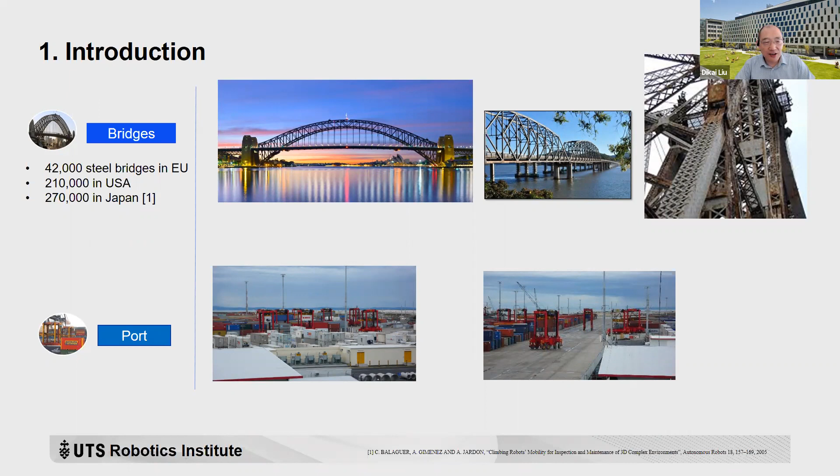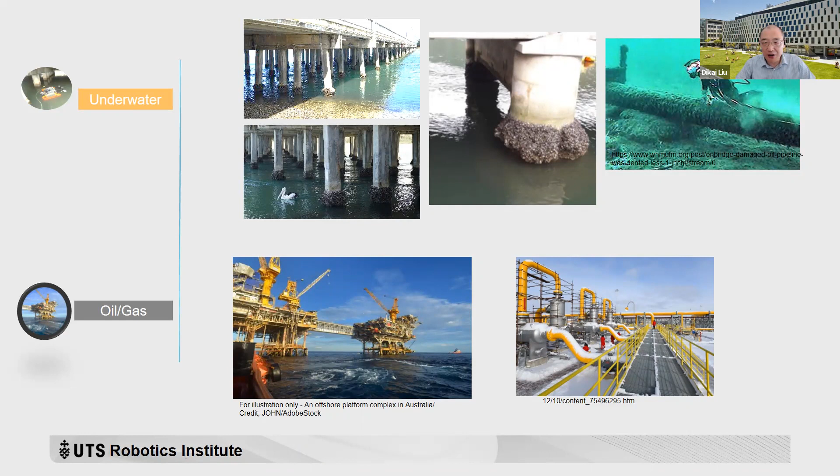Underwater structures, including bridge piles, wharf piles, and underwater pipes, are very important infrastructure as well. The oil and gas industry's infrastructure is vast and diverse, including offshore structures, pipelines, and many other facilities.

Maintaining such infrastructure regularly is very important to ensure and extend its service life. But unfortunately, manual operation is still the current practice everywhere in the world. For example, for maintaining steel structures, like steel bridges, before applying new paint we need to remove all the paint or rust, like what you can see here.

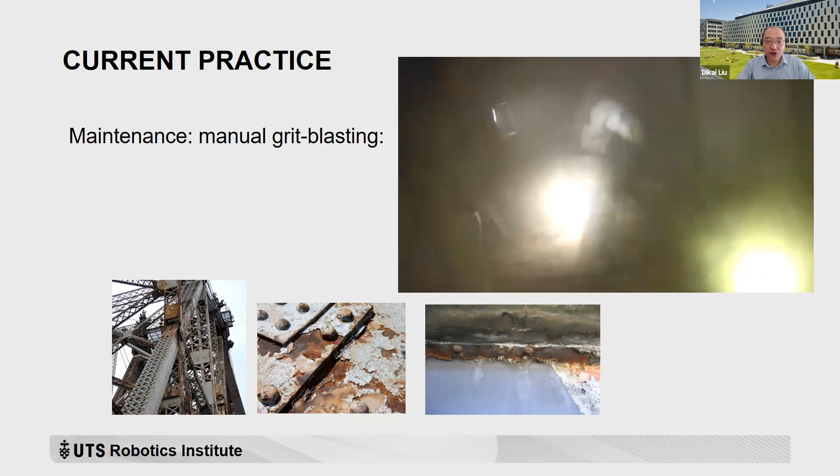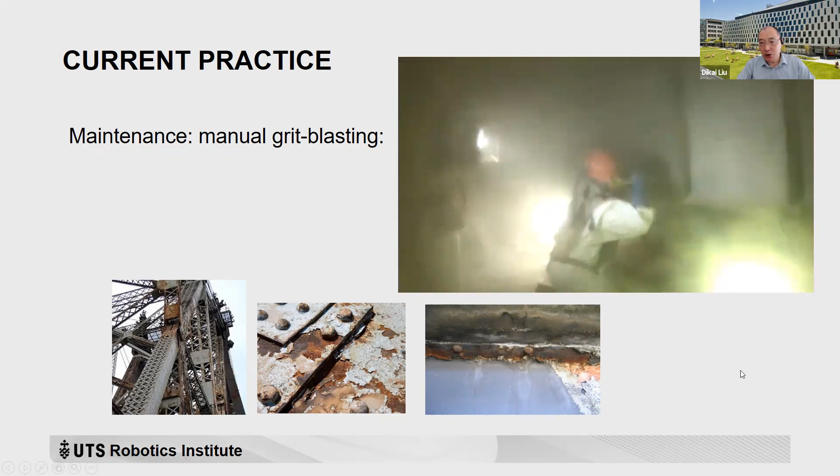Removing all the paint and rust, grit blasting is a typical operation. But grit blasting is so difficult and hazardous for people to work on - it's labor intensive, very dusty as you can see in the video, low visibility, and noisy. The fine particles may contain lead or other chemical substances, so it's very dangerous for people to do such operations.

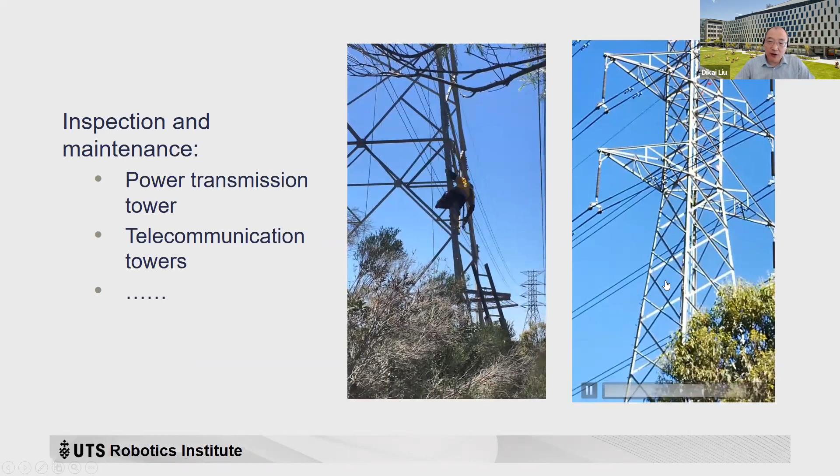Transmission towers, like you can see here, inspection and maintenance is very challenging as well. Human workers have to climb the pole structure, and doing the cleaning and painting is very difficult. You can see this person cleaning a transmission tower in Sydney, working at height in very awkward body poses. It's very difficult and dangerous for people to do this.

Maintaining underwater structures may be even harder because of the harsh marine environment.

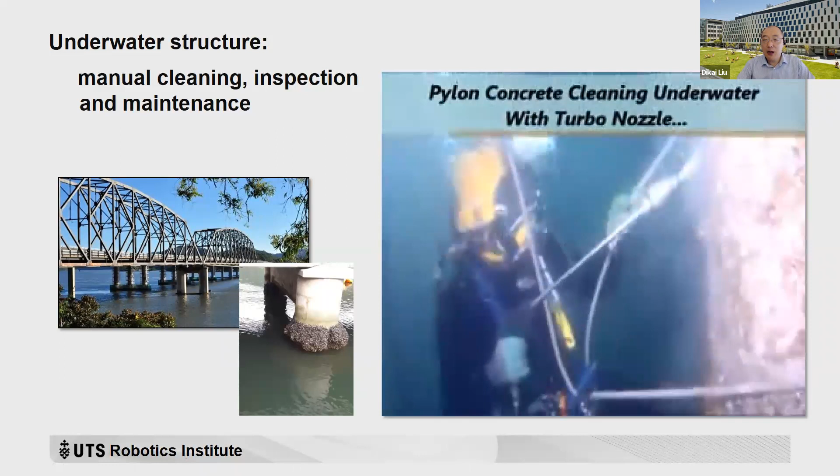Underwater structure normally covered by marine growth. In order to do inspection and maintenance, we need to remove the marine growth before doing the inspection and maintenance. But removing marine growth in underwater environments, particularly along coastal areas, is very difficult.

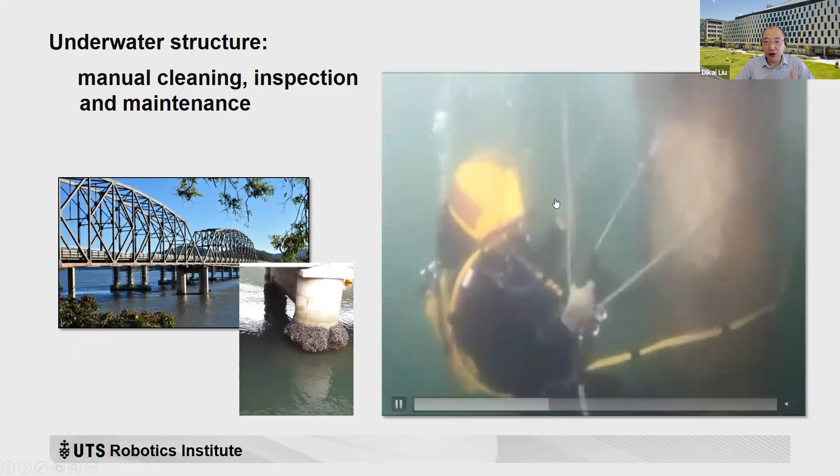You can see that this diver uses one hand to hold a water jet to clean the surface, and the other hand to hold a rope to make sure he is not pushed away by the water current. So this is very dangerous.

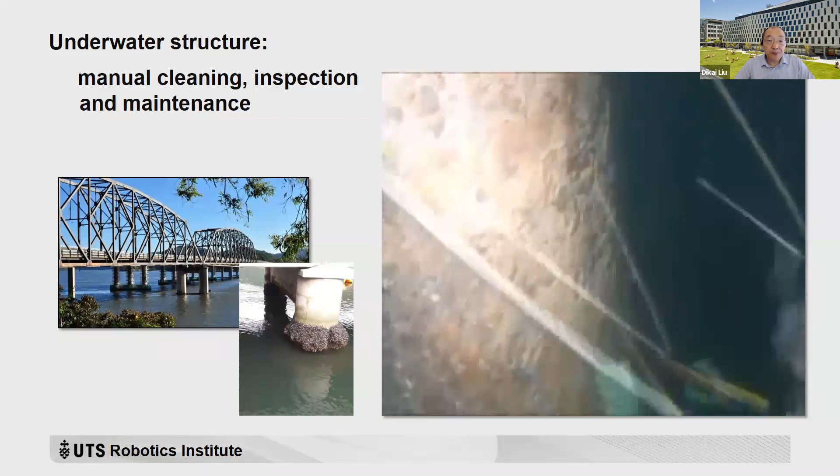There are many critical issues related to manual operation of civil infrastructure. OHS is a very important one because of the hostile and hazardous work environment, extremely labor intensive work, lead-based paint and fine particles in the air, and many areas that are difficult to access or are confined spaces. Work at height is another issue, and because of this, the cost is high, productivity is low, and the inspection and maintenance is not complete.

The results of the inspection are very subjective as well. So a promising solution here is to supplement manual labor with robotic labor. But traditional industrial robots cannot be used for such applications.

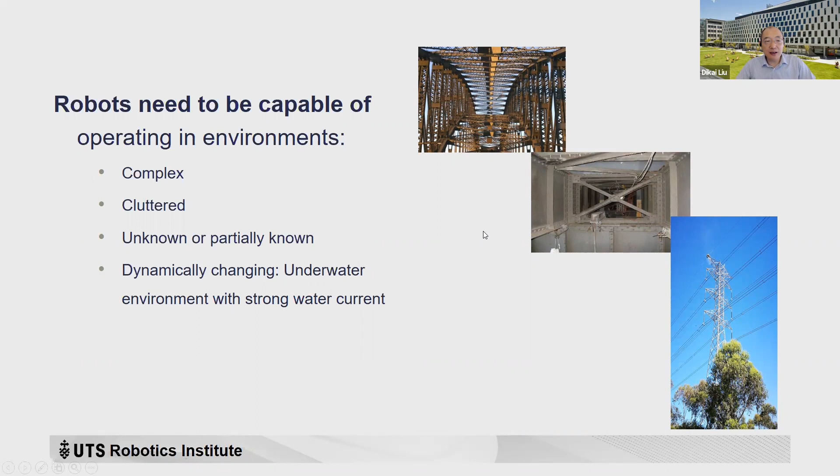Robots need to be capable of operating in environments that are complex, like this kind of environment here, cluttered, unknown, or partially known. The environment may also change dynamically, like the underwater environment. So in order for robots to operate in such environments, enough intelligence is needed. There are many research questions we have to address before we can develop intelligent robots for such applications.

Here are three of them. First one is, how can a robot move and support itself in such complex environments? So we need new design methodology here.

Second one is about intelligence. The robots need to be able to sense the environment, perceive the environment, navigate, build a map and localize within the environment. Also environmental and operational awareness, motion planning and collision avoidance, level of autonomy—how much intelligence a robot should have in order to do such operation or task.

Learning capability. So the third question is about robots working together with people. In order to do that, we have so many questions to answer. For example, human models, how to develop intuitive human-robot collaboration, and brain-robot interface. Those are the major questions that need to be answered.

Then develop methodologies that can help us to develop fully autonomous robots or robotic co-workers that can work together with people.

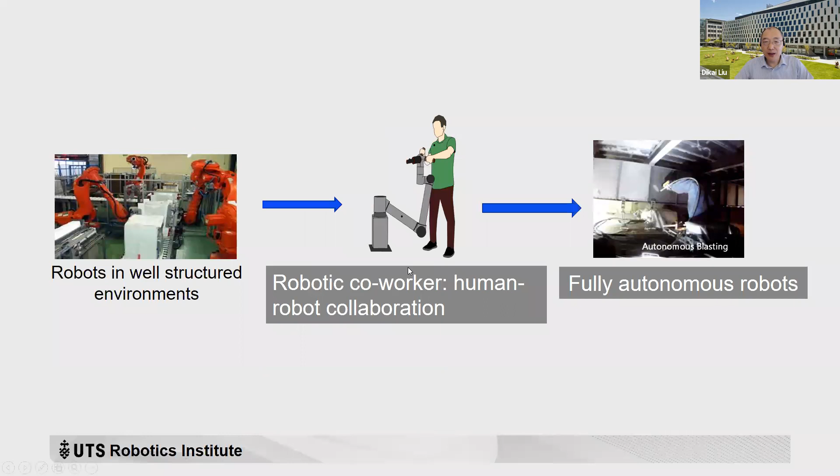My research since 2003 has been focused on those three topics. The first one is infrastructure robotics, basically developing robots for infrastructure. Second one is human-robot collaboration, developing robots for various applications in manufacturing, aged care, healthcare, and other industries as well. And robot teams, like many robots working together for container handling, warehouse automation, and construction automation for different applications.

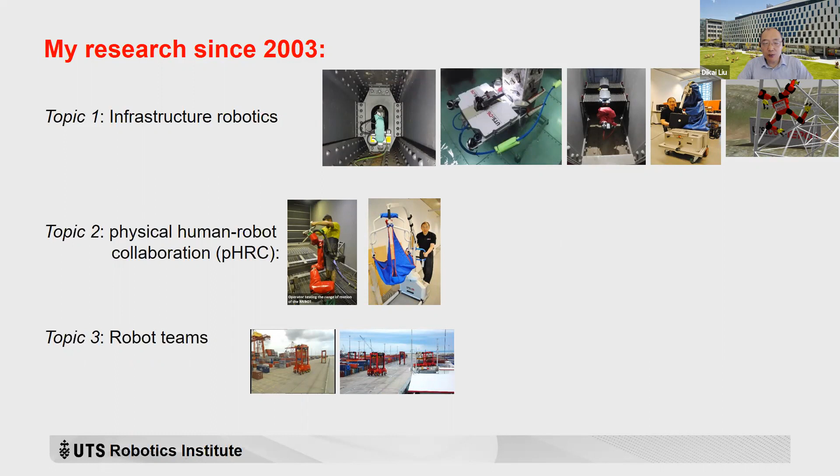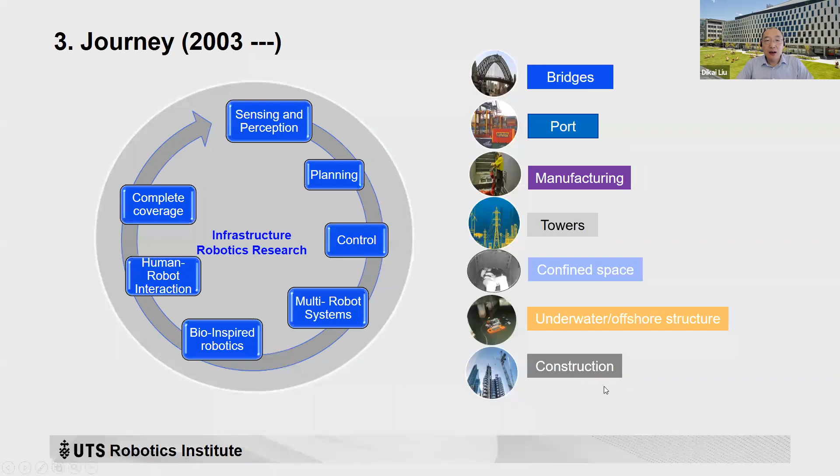So this research since 2003 has been applied in many applications, for example bridge maintenance, port automation, manufacturing, transmission tower maintenance, confined space inspection and maintenance, and underwater structure and construction automation as well. Today I don't have time to talk about everything, so I'll just talk about one topic, which is infrastructure robotics.

The first thing I'd like to talk about is design methodology, to answer the question: how can a robot move and support itself in complex infrastructure? We first look at ants, because ants are very, very good at climbing and also getting across obstacles, like what you can see in the video here.

Also transferring from the vertical surface to the horizontal. We designed an ant-like robot in the lab and did experiments. But unfortunately we found this robot cannot be used in practical applications, particularly applications like the Sydney Harbour Bridge, because of the robot's capability to move around and also to carry the payload needed to hold the tools for maintenance.

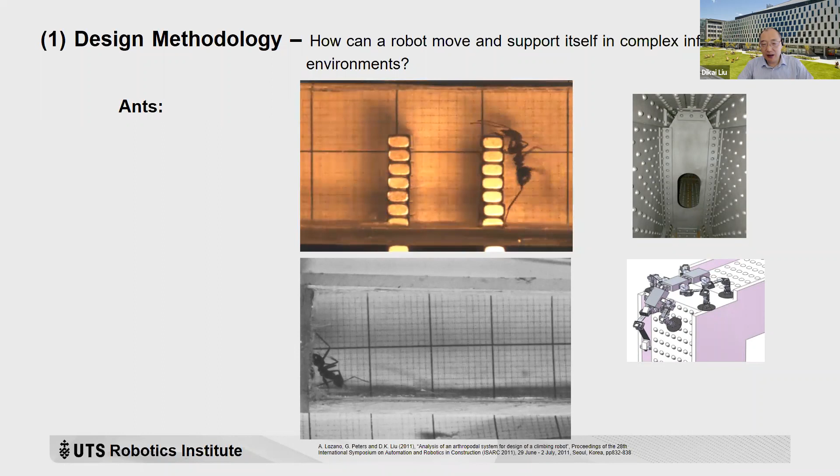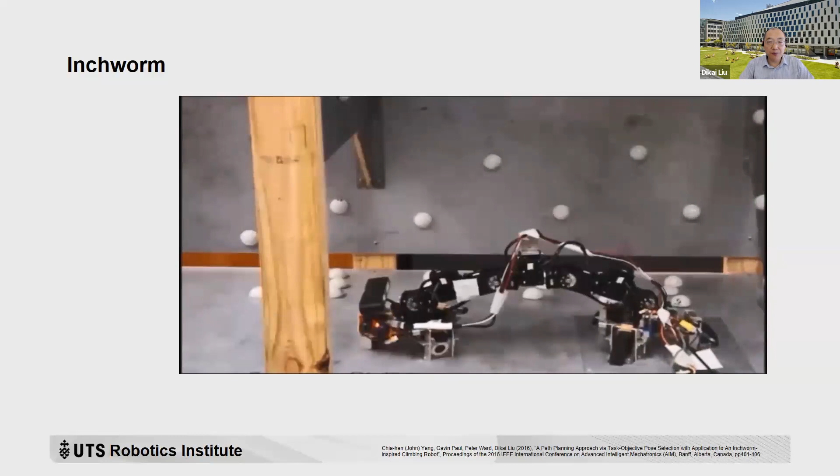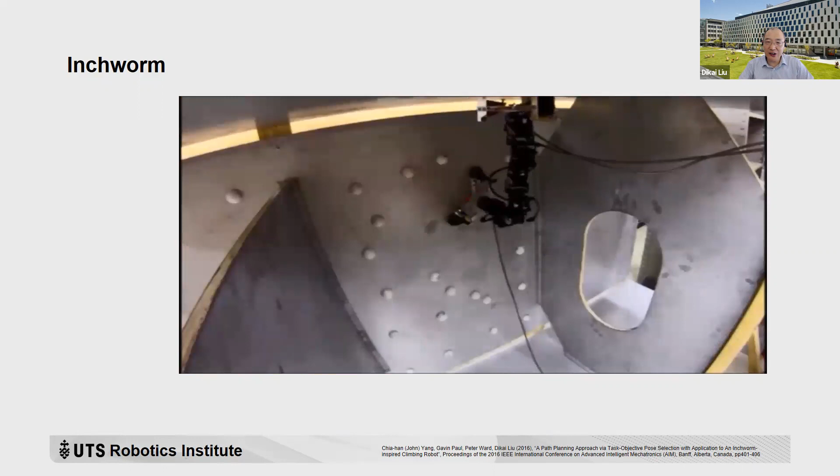We also looked at the inchworm, and we found the inchworm has a relatively simpler structure. Then we designed a prototype like this here, and did a lot of experiments in lab—for example, transferring from a horizontal surface to vertical here, then from vertical to another plate, and then going through a manhole.

We did a lot of research there, and we found this really helped us in developing a climbing robot, which I will be talking about.

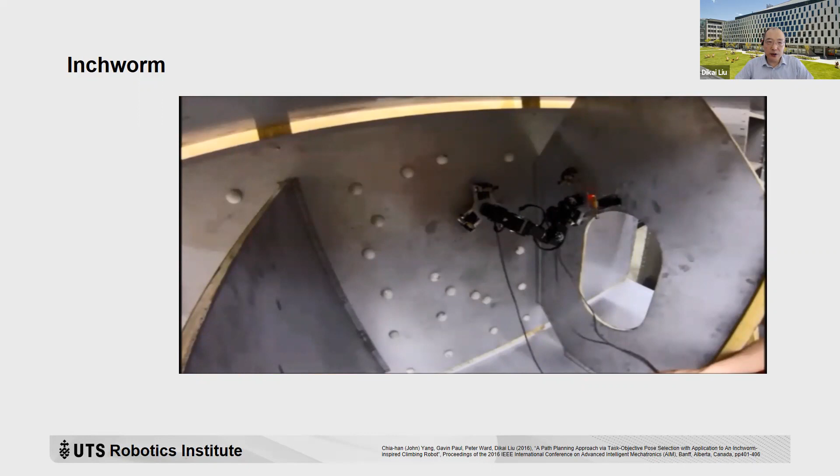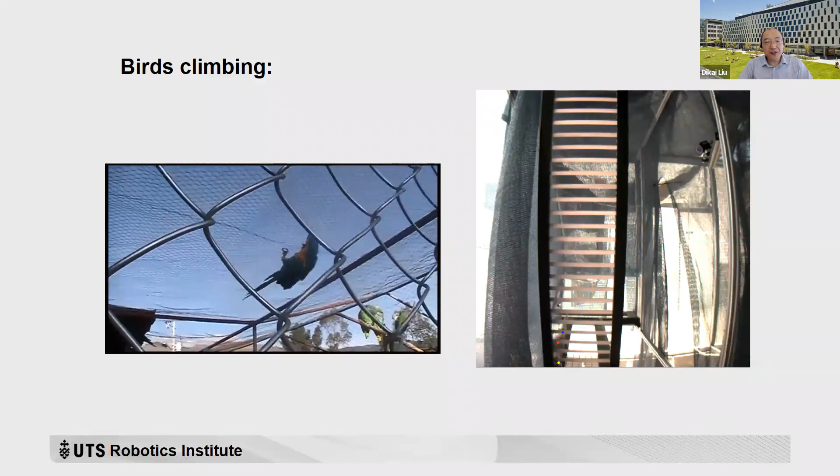Another research area we've been working on is looking at birds climbing various structures, as you can see here. It's very amazing how birds can really climb—they use their feet plus the beak plus the tail to balance and also for climbing.

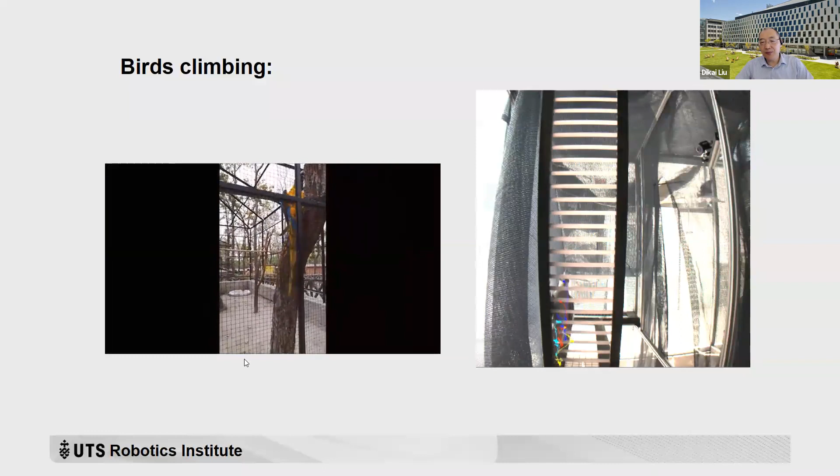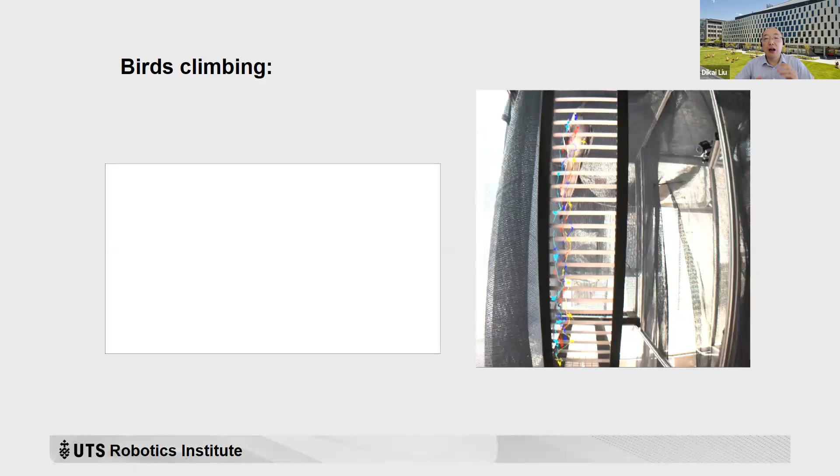We did experiments in an environment here, analyzing how birds climb this kind of ladder structure. We did analysis in terms of how the legs move, how the center of mass is kept, and how the beak is used at different angles. So for climbing truss structures, we also looked at how people climb truss structures like the transmission tower here.

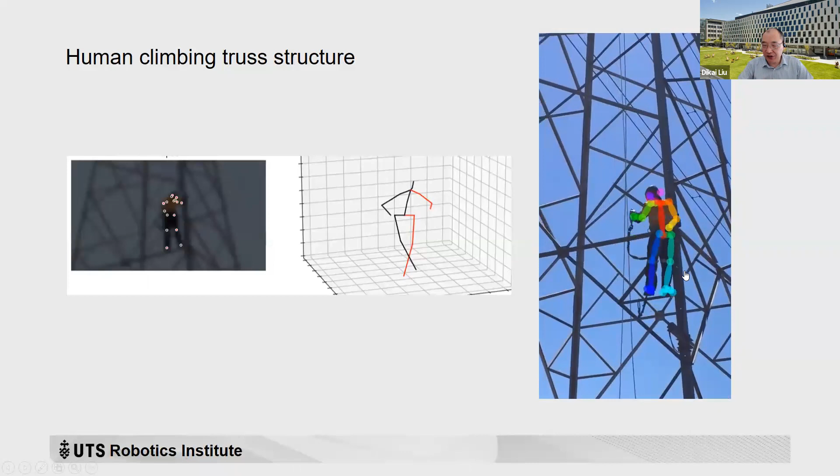We really want to learn how a human makes decisions when climbing such a tower - how a person ensures safety, keeps the center of mass or gravity in the right place, and how energy is used when climbing a structure like this. So we did a lot of experiments and analysis, putting markers on the climber and analyzing the trajectory. This is a very interesting research.

We have been hoping this research can help us design a robot which can climb transmission towers. This is part of the research we have been doing in collaboration with Tokyo Electric Power Company in Japan. I will be talking about some results here.

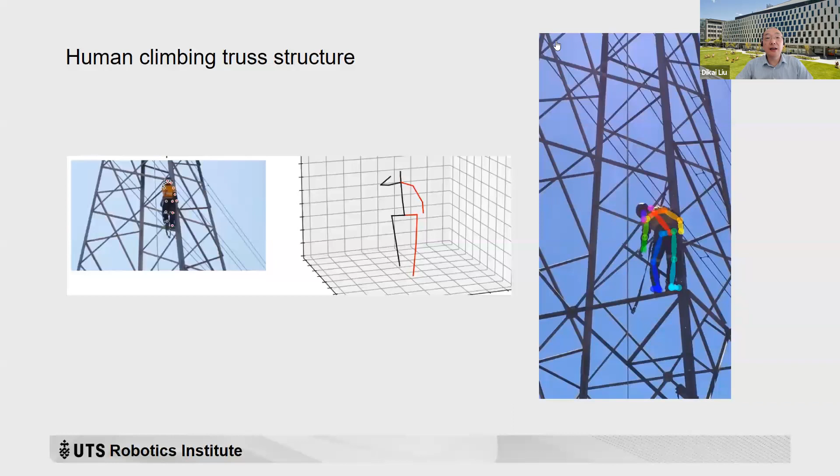The second thing is about intelligence. For a robot to operate in a very complex structural environment, the robot has to have enough intelligence, including sensing, perception, mapping, localization, and awareness of the environment and operation. In terms of knowledge of the environment, the robot should know the geometry, the details of the surface, and conditions, and where the robot is in such environment.

In confined spaces, this is very challenging. The robot needs to work out where to look and how to explore, and whether it has enough information or not - all those questions the robot needs to decide.

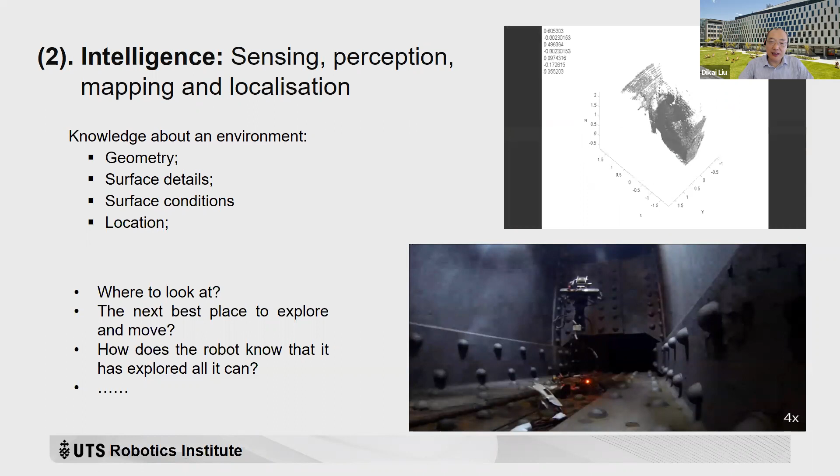What you can see here is the prototype robot on the Sydney Harbour Bridge. It uses sensors to explore the environment to find the rivets, the plates, the connections, for the next operation like planning and movement.

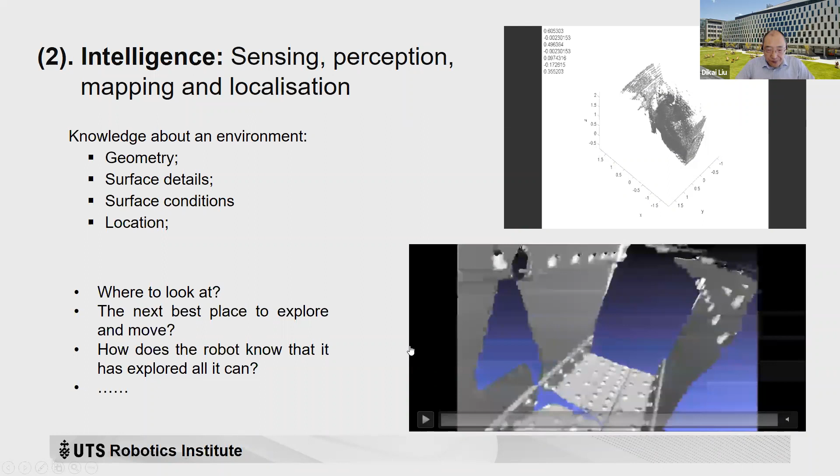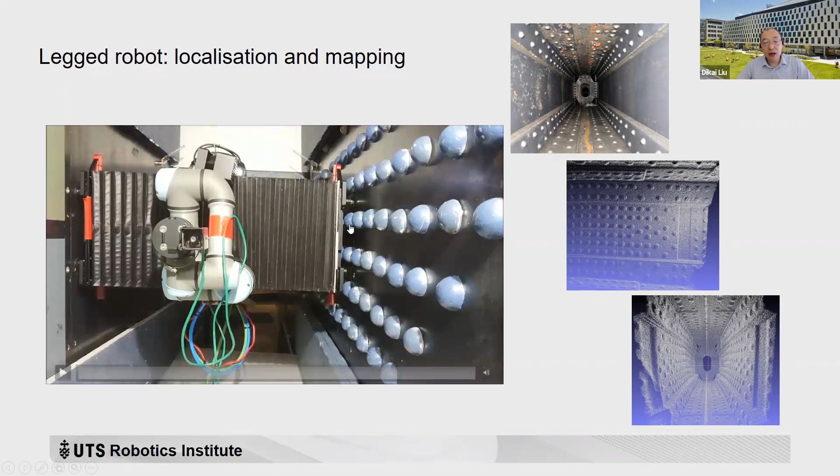Here is another legged robot we developed for the Sydney Harbour Bridge. The robot uses sensors to explore the environment, build the map, particularly the rivets, and also identify the space between the rivets, which is quite important for the robot leg to stick to or push onto. Again this is about knowledge of the environment and planning.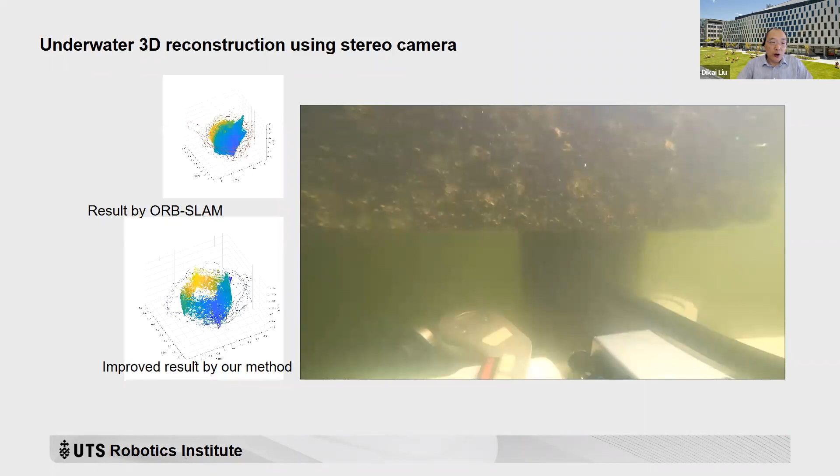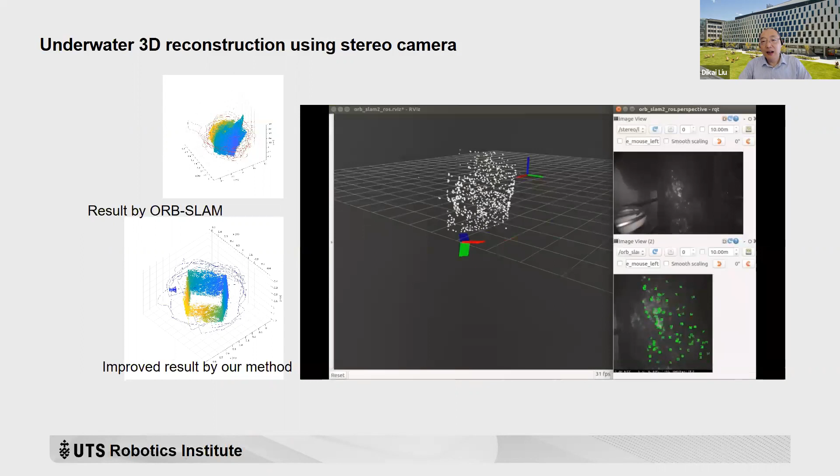For underwater structures, this is probably more difficult because of low visibility and water currents. So we built a map of the bridge pile, and had a robot tested many times in the bridge structure around Sydney. The robot moves around the bridge pile, uses sensors to collect information, and also identifies the marine growth on the surface.

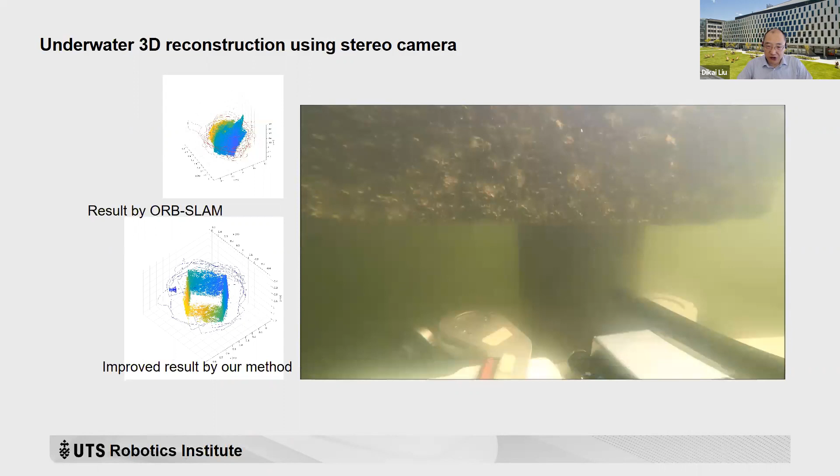After the robot has the knowledge of the environment, it has to be able to do planning in real time. We look at various planning approaches and algorithms, and also how to handle the uncertain information the robot collects by sensors. This shows the planning, and also a prototype robot in our lab and how it can move in this environment.

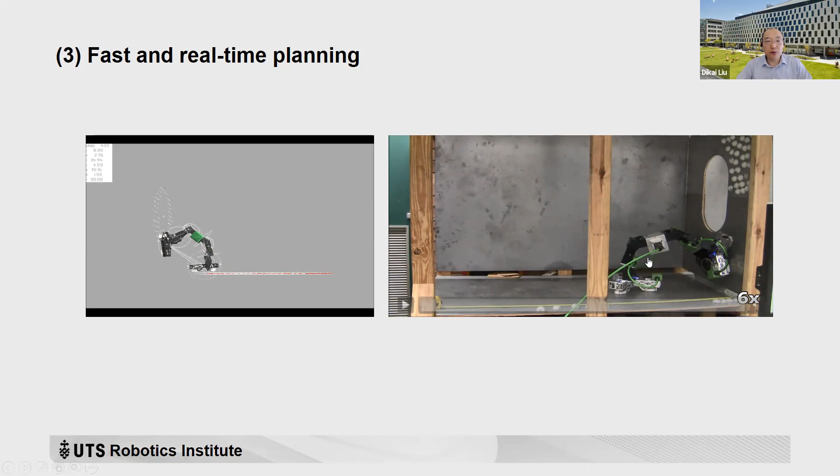Here is a prototype robot in a bridge structure, moving around in the rivet-dense area, and also transferring from the ground to the vertical surface and moving around. What we have done is quite good - even in this kind of environment with a lot of dust and rust, the robot can still stick onto it and move around safely.

Going through a manhole is another challenge, particularly in the confined space here. The robot needs really good knowledge of the environment before it can stick and move around.

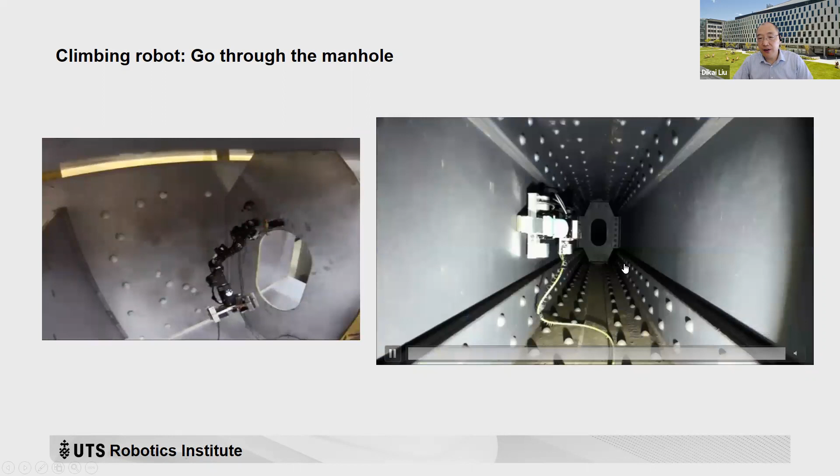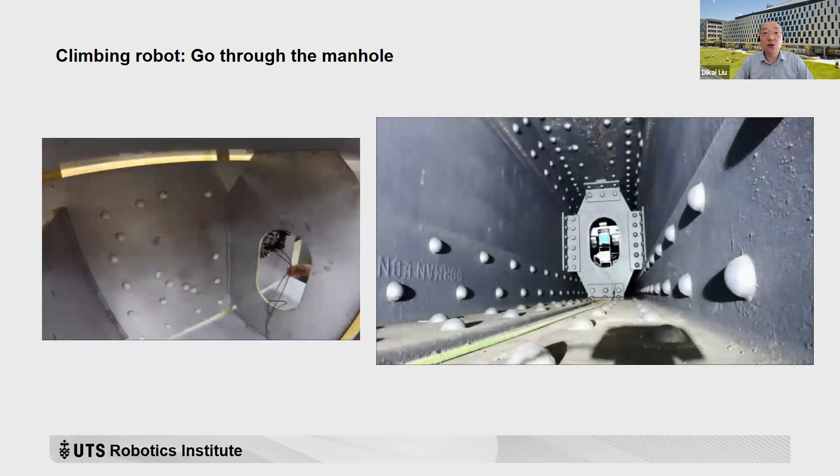In this video, the manhole is small and there are rivets here. The robot really has to select where to step and also adjust its step before going through the manhole - this is quite challenging. But here again, this legged robot goes through the manhole by itself. All of what I'm talking about here, the robots are fully autonomous - all these decisions are made by the robot itself. You can see here, again, this is in the real environment with our robots going through the manhole.

Underwater environments can be very complicated, with a lot of structures. How can we get a robot, a mobile platform with a manipulator, going through the underwater environment and make sure it does not collide with the environment? This is another challenge, particularly because there are a lot of uncertainties in the harsh marine environment.

If we have many robots working together, how are those robots going to coordinate among them? For example, which robot is going to do what, and how the robot is going to achieve an optimal result as a team, not individual, as a team. So this creates the coverage problem by many robots.

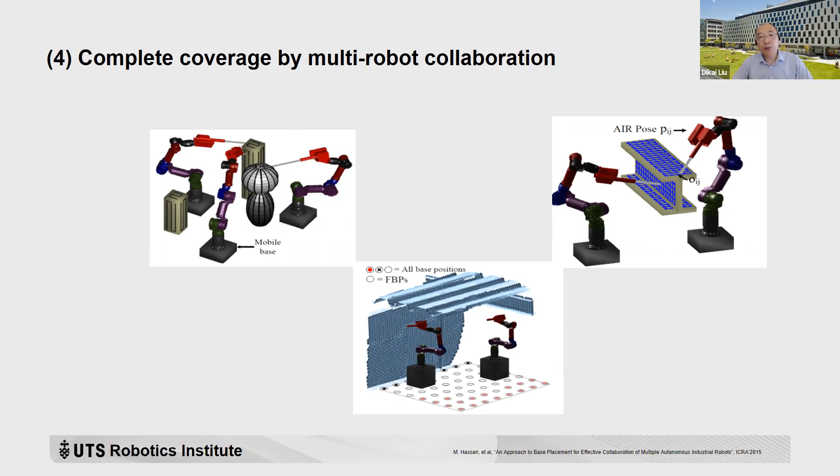Another challenge here is about system development and integration. Many people have said we have been doing a lot of research and publishing many papers, but to develop and integrate a system and make sure it can be used in real applications is very challenging. I totally agree with that.

This is a very big challenge. We've had so many years of experience, or failures, designing very complicated systems. It's a kind of system of systems, with so many different modules: hardware, software, electronics, mechanical, and sensing as well. This is just one example, the climbing robot we developed for inspection of confined space.

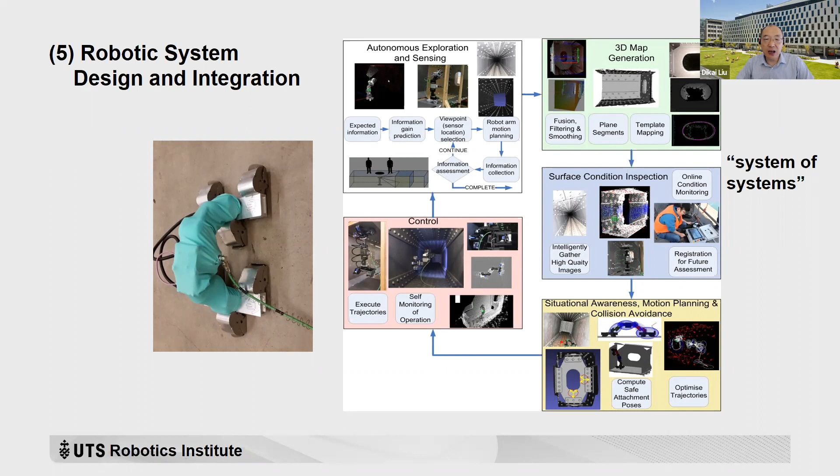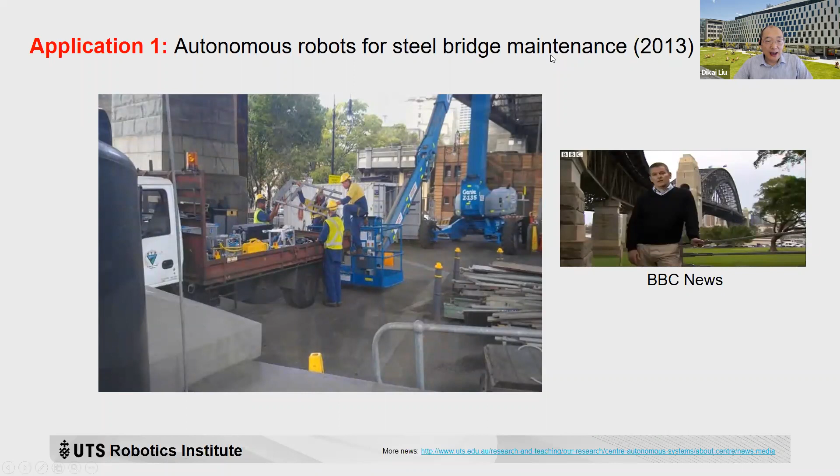So that's the research part. I'll talk about several examples of how we applied our research in developing robotic systems for practical industry applications. Here is the first one: we developed autonomous robots for steel bridge maintenance. This work was done back in 2013.

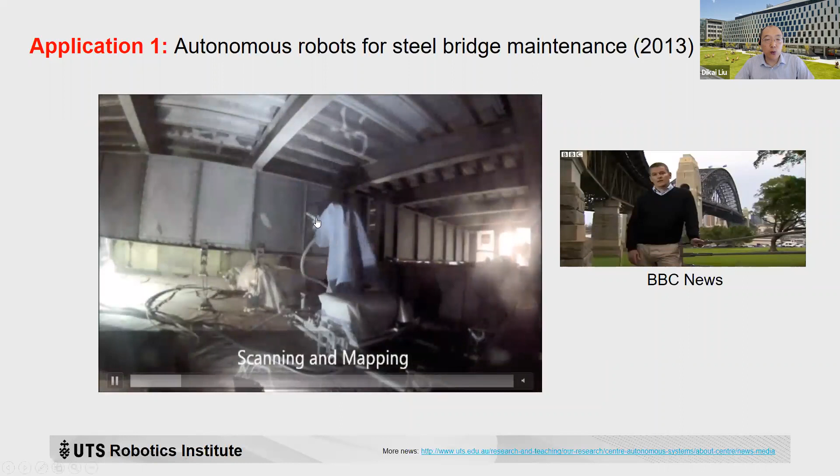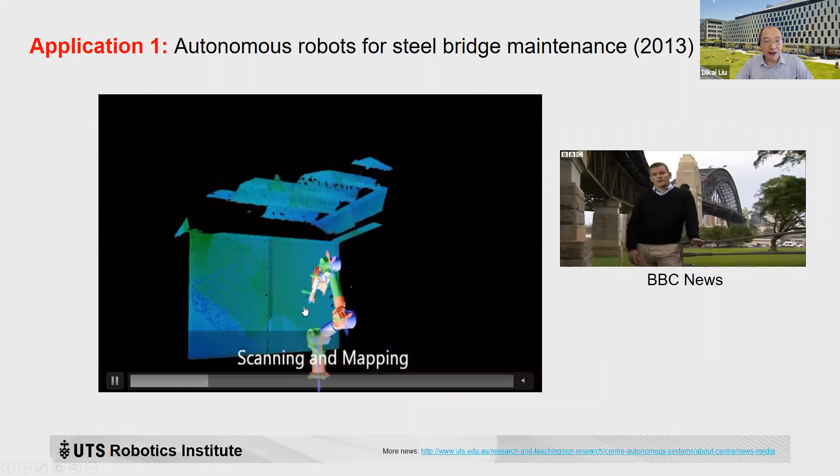This is the robot we developed. At the beginning, the robot was placed on a wheeled platform which could move around. Then our partners said they did not prefer a wheeled robot, because when the robot does the blasting, the reacting force from the nozzle would push the robot away, and if the brake doesn't work well, there's a problem. So we started to use rail there, but this robot can still be used on a wheeled platform.

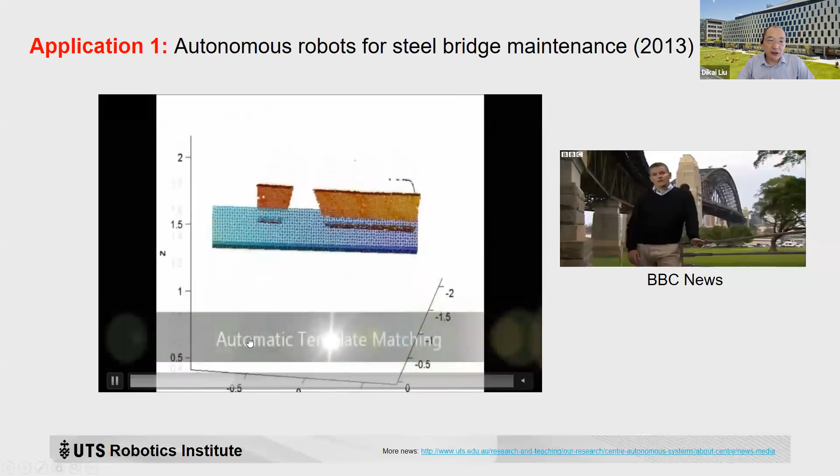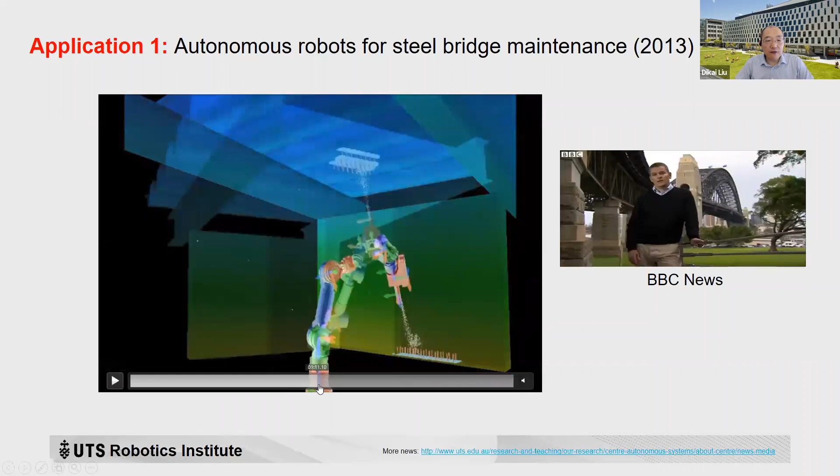The robot uses sensors to explore the environment, builds a map, and based on the map starts to do the planning. After the planning is done, the robot starts to do the blasting. Everything is done by the robot itself.

We have two such robots on the bridge, and this technology has been commercialized, with sales in the US, Europe, Japan, and Australia as well.

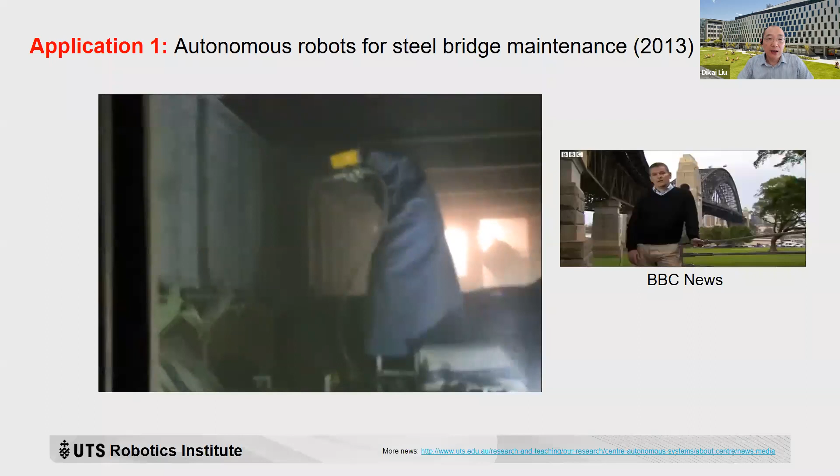By doing this research we learned a lot about research questions and enabling methodologies. At the beginning, we had so many questions unanswered, and we didn't have much methodology that could be directly used. So excellent research is quite important.

Second, algorithms that work in simulation can't work in the live environment, because in simulation we may not worry about the uncertainty, the efficiency, and the robustness. But for real implementation, particularly for real applications, it's very challenging.

Another challenge is developing robotic systems. For a robot to be used in an infrastructure environment, one question is how much prior knowledge a robot should have. Is this kind of prior knowledge really available? The answer is no, because a lot of infrastructure was built many years back, and the model may not be accurate since many changes have been made since it was built. So a big team and big resources are required for researchers and engineers to develop such a robot.

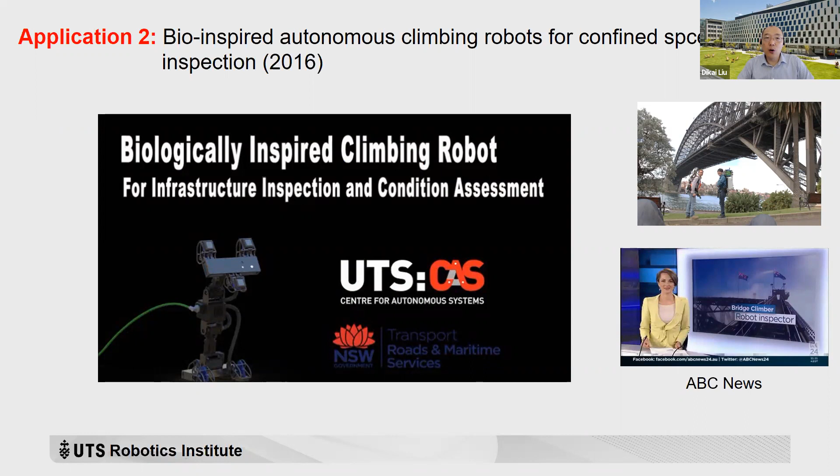Second application here is about a robot for inspection of confined space. This work was done in 2016. This is the inchworm robot we developed for confined space inspection.

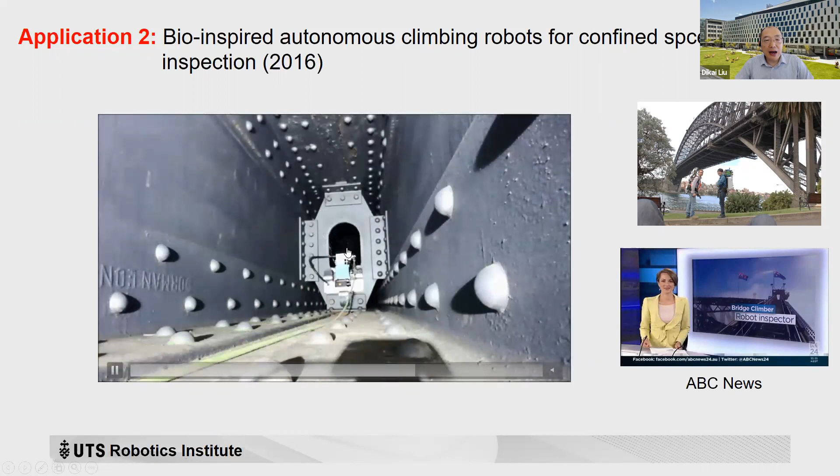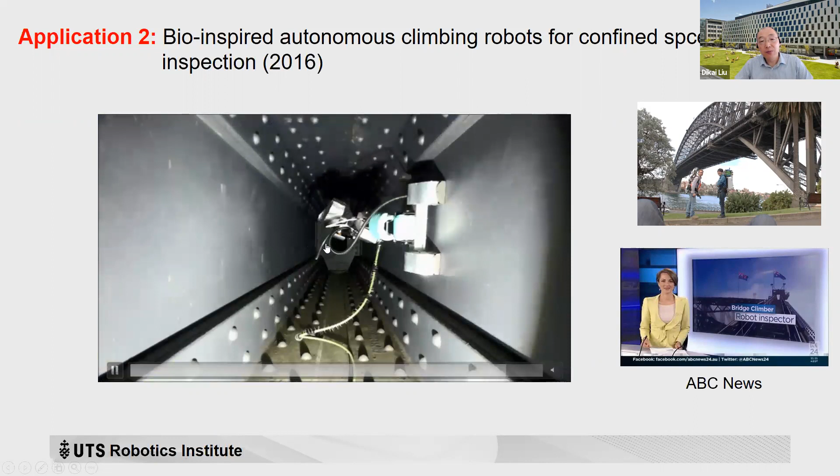You put the robot into the confined space through a small hole, and the robot uses sensors to get knowledge of the environment, then selects the safest or best way to move. When the robot meets a partition plate with a manhole, it needs to plan and work out the safer way to go to the other side, through the manhole, and then come back. All the information is collected and used for inspection.

This robot has been deployed as well, but we had so many challenges developing it, which really emphasized the challenges of developing robots for practical applications. The robot was tested over 70 times in the bridge, which shows how much effort we and the people involved put in.

Every time we test the robot in the test rig, which is a 1-to-1 scale of the real environment, we were confident it should work for the next site trial. But as soon as the robot is moved to the real environment, it came back with a fail. So very little difference between the real environment and the lab environment may cause a failure. This is quite difficult.

It's design challenging, and not only the challenge related to the design of the body, but also the adhesion mechanism. This is another big challenge as well.

Adhesion mechanisms for different materials and structures have to be different. We designed a magnetic-based adhesion device which can firmly stick to a steel structure, and if we want to peel it off, we have a mechanism for that. We got a patent in the US and in Australia.

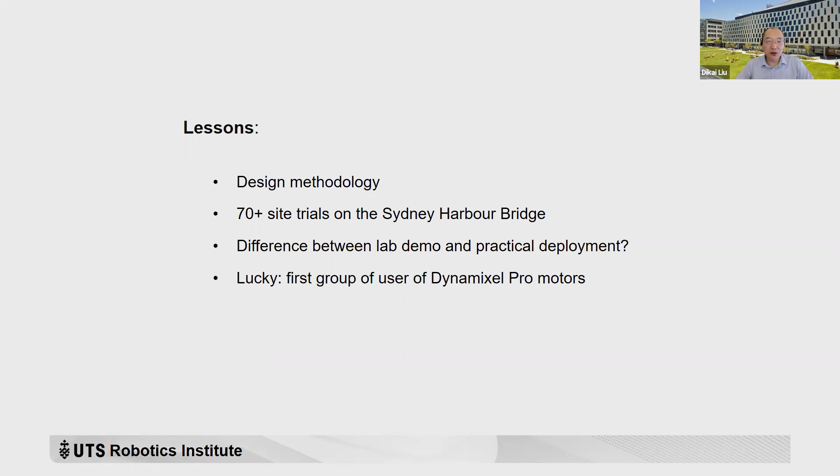A very big challenge here is really about the rivets. The robot has to understand the environment with the rivets and step onto the space among them. That's a very big challenge, and the pattern of the rivets is different as well.

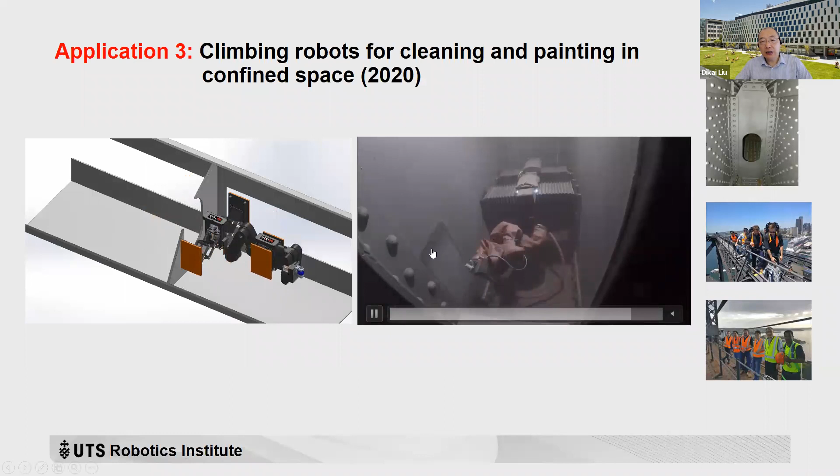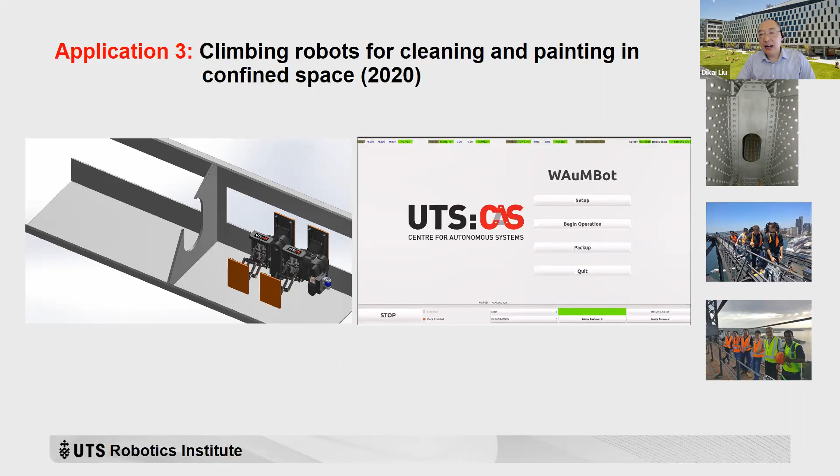After the robot gets enough knowledge of the environment and gets into position, it can use the sensor or tool to clean the environment. In this case, grit blasting, vacuuming, and then painting afterward. This robot was developed last year and is now ready for deployment in real applications. A lot of challenges flowed from this as well.

Underwater structures. Underwater structure work is even harder because of the structure itself - it could be timber, concrete, or steel, and is normally covered by marine growth.

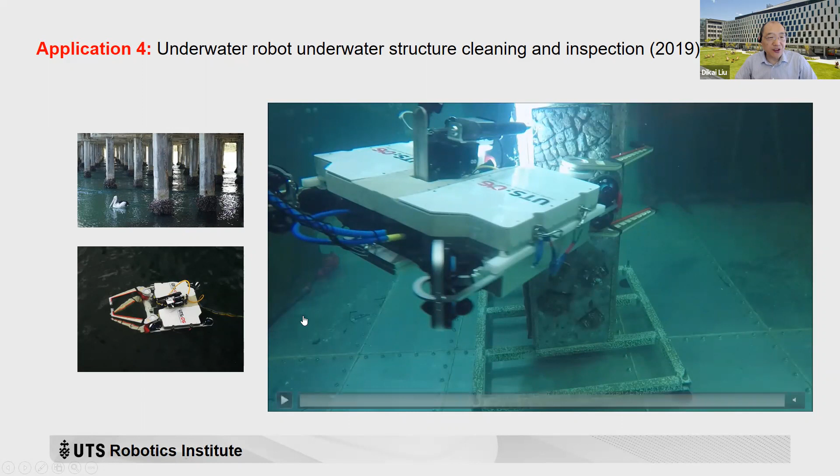In order to inspect it, we have to remove the marine growth, and the marine growth differs from the water level down to 5 or 10 meters in depth. So the robot has to recognize what material the marine growth is and the best way to clean it.

This is the robot we developed and tested in many bridges around Sydney. This is the experiment we did in the lab environment, showing how the robot moves around a bridge pier, using sensors to collect information and identify the marine growth.

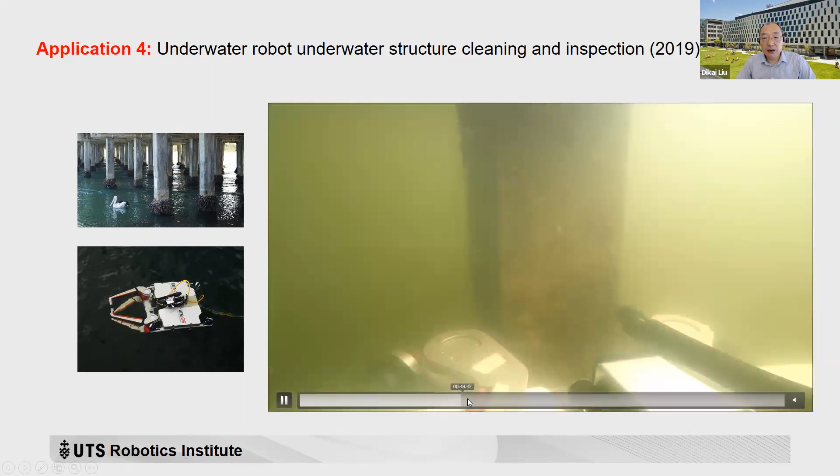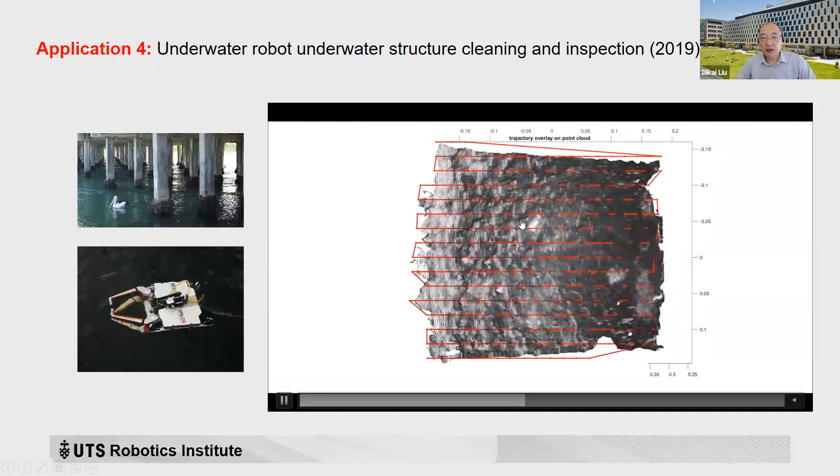This is the testing of the robot on a bridge around Sydney, not in the lab environment. It identifies the marine growth, then automatically works out a way to clean it - this is the planning done by the robot, and this is the cleaning.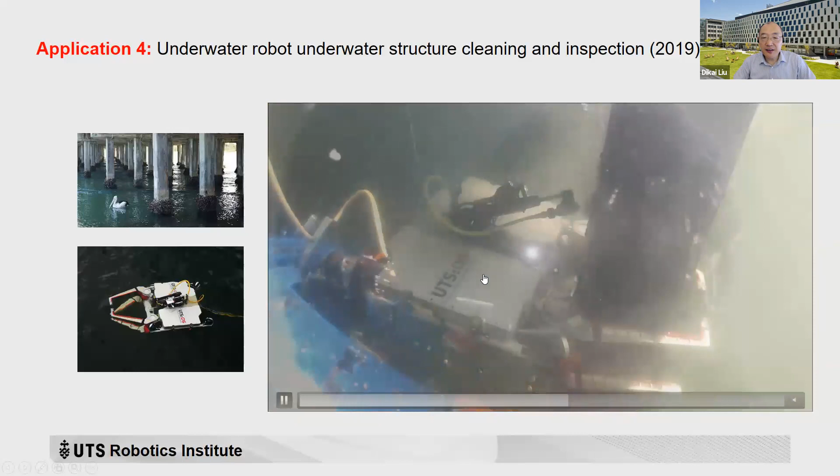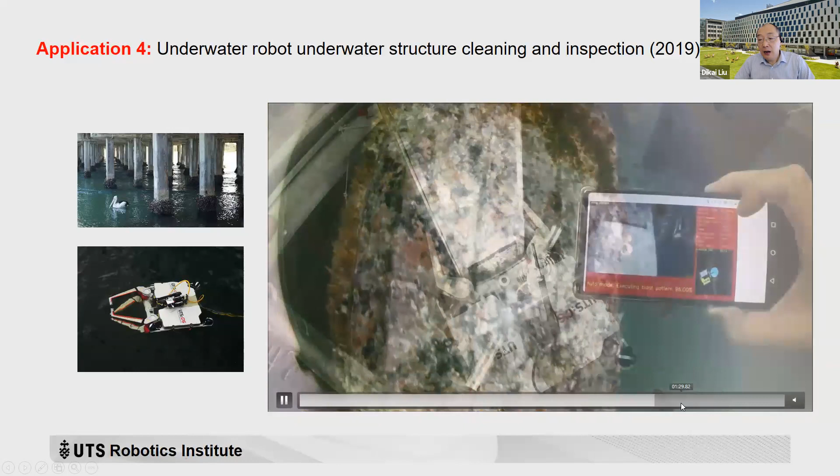Again, everything is decided by the robot itself in the environment. After the structure is cleaned, the robot does the inspection, collecting information. You can see here, this is clean, this is not clean. We identified many problems with this robot as well.

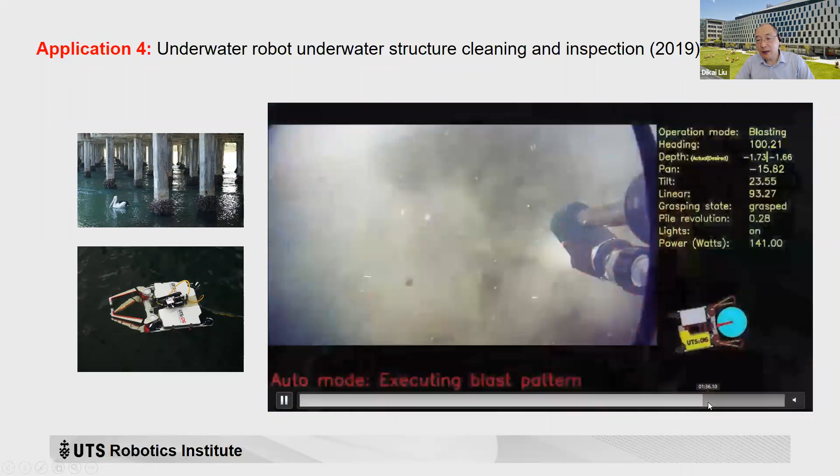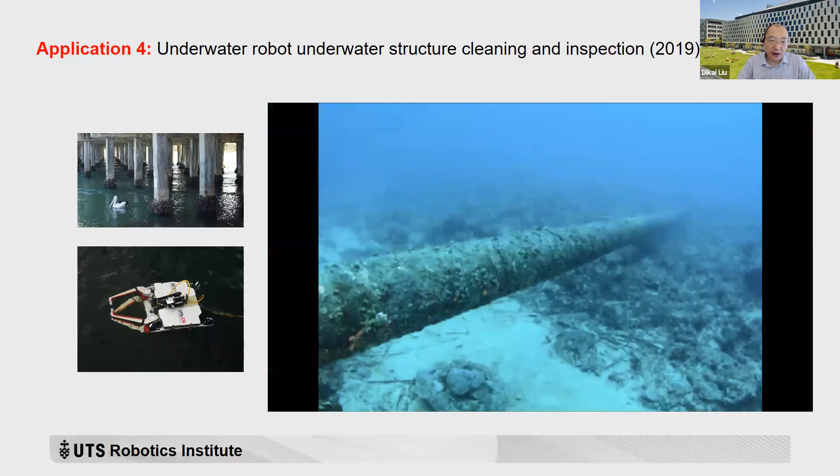What the user needs to do is basically stay on the boat or nearby and watch how the robot is doing. If the robot is doing something wrong, people can remotely change or interact with it. It can be used in many other applications as well.

The harsh marine environment is very challenging, particularly along the coast area. The water current is very difficult to predict and quite strong, and visibility is low. This means many available algorithms may not work well, and how the robot interacts with the environment is another issue.

We applied machine learning to help the robot operate in such environments, particularly to remove or reject disturbances and keep it stable with robust navigation. We developed many different generations of robots.

You can see from the big and simpler one into the more complicated one. This is the one that has been tested in many real bridges. So you can see almost 4 generations of underwater robots for real bridges we have developed.

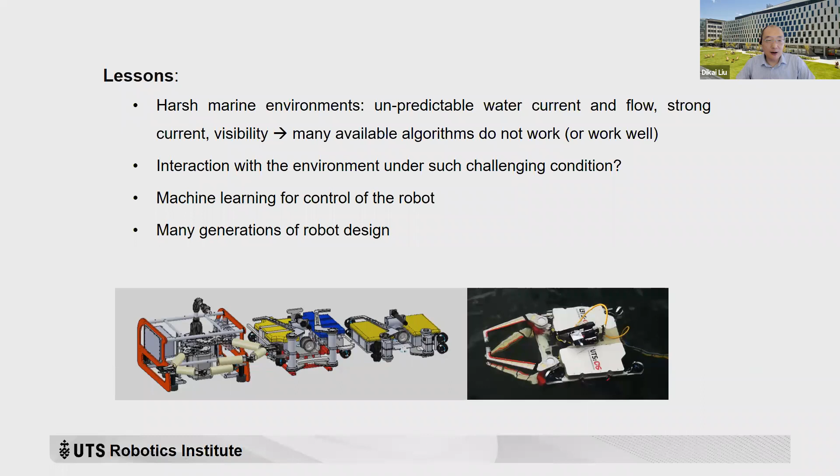One more application. Of course, different applications or different robots we developed present different challenges. This is a robot we have been developing since 2017 for transmission towers in the power industry. Our collaborator is Tokyo Electric Power Company in Japan.

This research has gone through many stages and many iterations. Basically, what we've been developing is a robot which can either climb to a location in a tall tower like this one, or is sent by another device or system to somewhere, and then the robot uses sensors to look at the surface of the structure in much more detail.

Of course, you can think of drones doing the inspection, but drones can only stay relatively far away from the structure, and particularly on the corners and connections, the drones may not be able to look at those areas, but those are the areas that get rusted the most or require maintenance.

That's why drones and this kind of climbing robot can be combined. Drones can do a rough inspection, but this robot can be used to do the detailed inspection. Even more, this robot can be used for maintenance, such as cleaning, to remove the old paint and rust.

Of course, we can use plastic blasting, like we did, you saw before. Or second, we can use mechanical tools, like grinders. But all these are difficult.

What we are looking at right now is really the laser system. Because if you use grit blasting, there's a huge amount of waste, which is not good for the environment. And if you use a mechanical tool to clean it, it's very difficult, particularly for a robot to do it with high speed, since big inertia is very difficult. But using laser could be a good option.

But this really depends on the technology of laser systems available right now, so we have to do a lot of research and experiment, both in the lab and on site. We have identified a type of laser that can be used, but currently the laser system's productivity is quite low. Still, if you don't have a better option, at least right now, it is one solution.

Another work we've been doing is with physicists in the Australian National University, developing new types of laser systems which can clean the surface much quicker, get better quality, and not affect the structure as much. I'm expecting in 2 or 3 years we can have a much better laser system available.

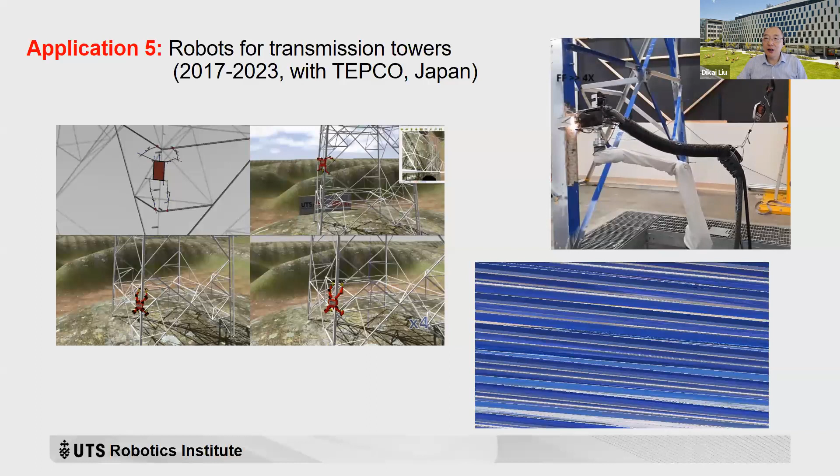So once we have the robot available, and a good laser cleaning system available, the technology for maintaining tower structures like this will be changed significantly. This is what we've been doing here.

After you clean the surface, the next step is painting. Of course, you can use a brush, but then you have to have human workers there. If you have a robot up there, can we just use the robot to do the painting? For example, this is the robot doing the undercoat painting.

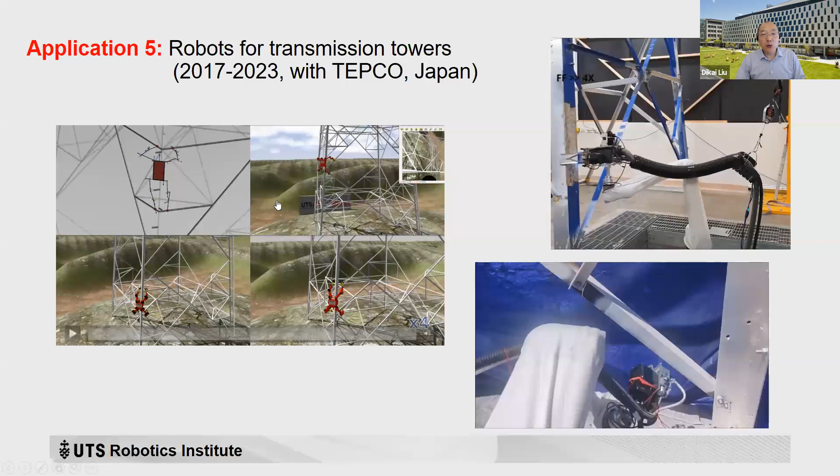But for a robot to do cleaning and painting, it must have enough intelligence. This operation environment is different from a flat steel structure, because the members have different sizes, orientations, and connections, and the structure is very sparse at the bottom but has many more members once you get to the top of the tower.

This is really challenging, and we have a big team working on this. I'd like to acknowledge the very strong support from TEPCO Japan.

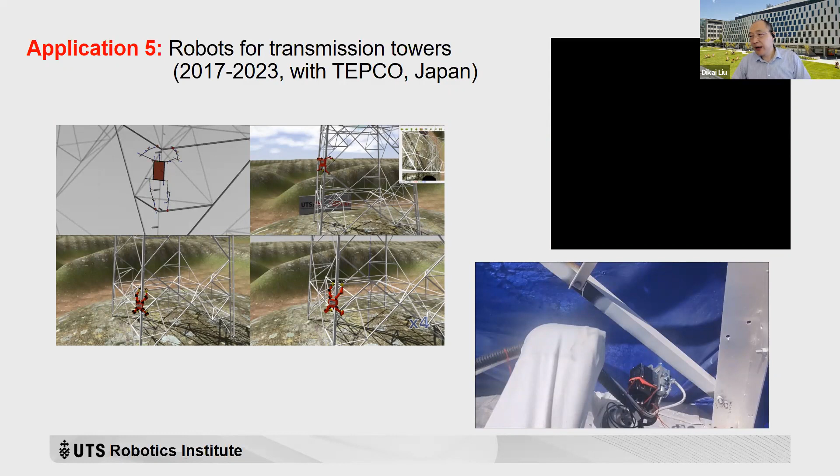One more application here, probably I just mentioned for Antarctica, particularly for climate research.

Under the ice, the robot expands, and after that the robot can navigate around and use the sensor here to do various measurements, then collect the information and send it up.

Otherwise people have to stand here on the very thin ice, which is dangerous, and put the sensor in, but the sensor can only look at the small area around there. If we have a robot which can navigate a big area under this ice, the information collected by the robot will be significantly more than what a manual operation can do, and it also makes it much safer for human workers.

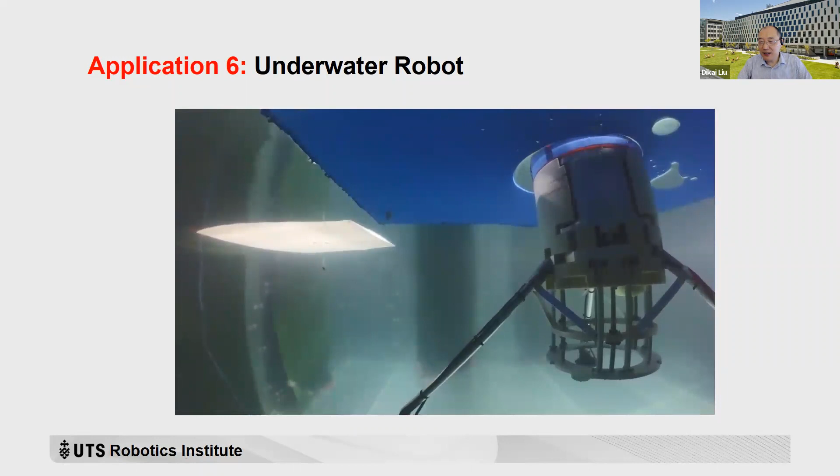After the information is collected, the robot can come back to the entrance point and come up. So this is what we have done in the lab testing. We need to develop this robot a lot more before it can really be tested in Antarctica. So again, this is another application, particularly of intelligent robots for different applications.

Okay, those are the applications I'd like to mention today for the infrastructure robotics research. So we've been doing fundamental robotics research here, getting the technology readiness level to 4 or 5. Then we've been doing applied robotics research as well to get the technology readiness level to 7, then translation. So closing the loop is quite important, particularly from research to translation to generate impact.

And also by doing this, we get more research questions, and we can formulate these research questions and get the postdocs and PhD students to work on them. This is another way to get more research funding as well.

In order to have a very good application, or for the technology to be accepted by real industry, you have to solve their major pain points. So you have to have excellent research - this is quite important. Your research needs to be excellent and also earlier than other people's, because otherwise, if everyone can do it, your research may be behind or it's difficult to get it translated.

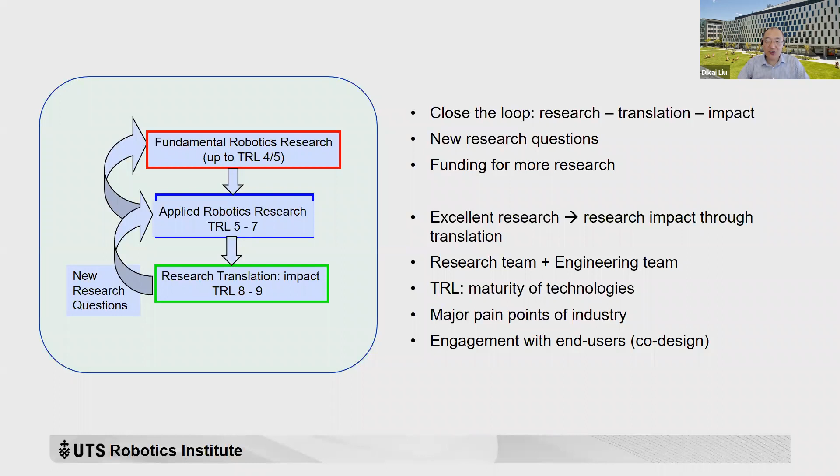Okay, I'd like to acknowledge many people - everything presented here is the outcome of many people's research. I've been working with pretty much everyone in the Robotics Institute, every academic, and many research students, research fellows and research engineers contributed to this project. Undergraduate students also got a very good way to be trained through this.

I'd also like to acknowledge the Roads and Maritime Services of New South Wales, Forward Technologies, and Sabre Autonomous Solutions, who is commercializing the blasting robot, and TEPCO as well, and also the Australian Research Council.